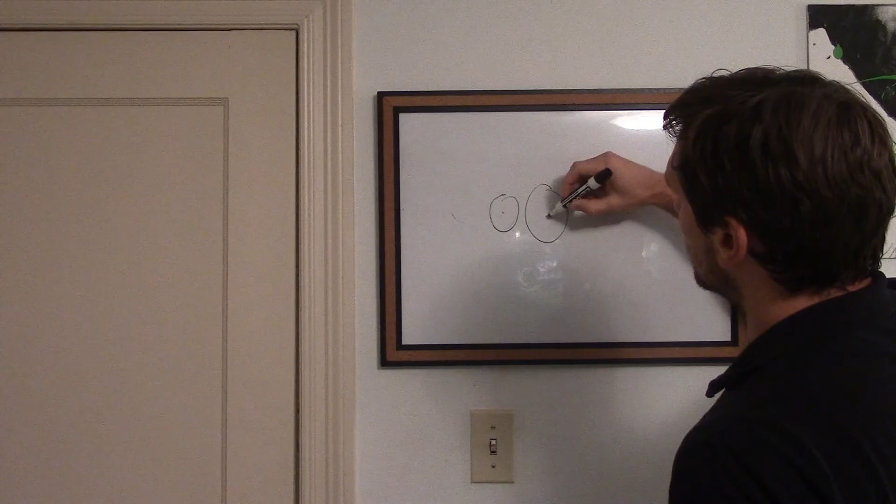So if the diameter of this circle is 1 and this is 2, then basically the torque will double. That relationship is very simple. So that's the uninteresting bit about gears.

So the thing that I found non-obvious was it would be great if we could just design gears as though they were circles and put them together, and if you want twice as much torque, you just make one circle and put it next to another one, and they work great. You could even envision it as a circle, and maybe you put a rubber band on the circle and they touch each other and one spins, and if that works for your situation, then that'd be awesome.

But generally what you need is these teeth on the gear, and the teeth will just act like this. And this wasn't obvious for me. I always thought teeth on gears were just square, but they're actually not square. They're actually kind of curved at the top, and I'm going to talk about that curve and how to make it.

So when designing a gear, you can really think about just two things. You need to think about how many teeth are on the gear, and this gear has 18 teeth, and then the diameter. This gear happens to be 40 millimeters. Once you know those two things, you can design your first tooth. Generally you want to design the smaller gear first and then the bigger one.

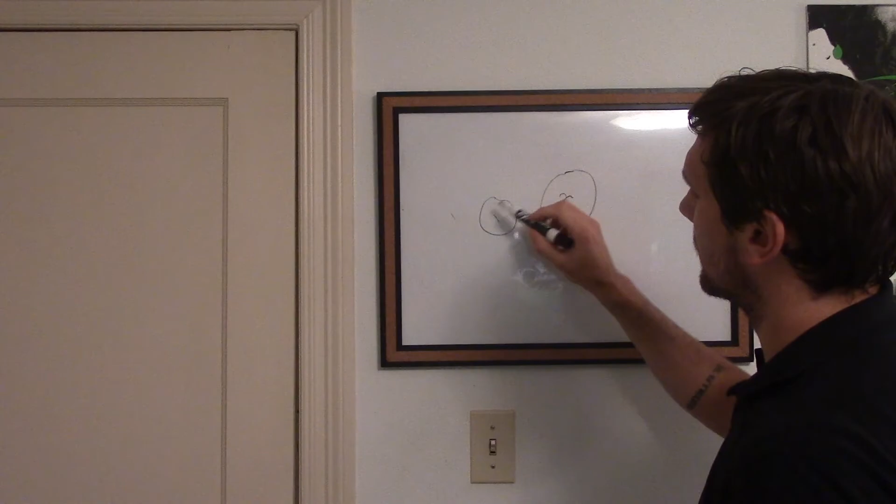And here's why. When you're designing a gear, you need to make sure that the ratio between the diameter and the number of teeth is equal on any gear. So what I mean by that is if you have a gear that has a diameter of 1 and it has 18 teeth, and you have a gear with a diameter of 2, then you're going to need twice that many teeth. So on this one, you're going to need 36 teeth. So think about your first gear, and then just double it, and you'll also double the teeth amount.

And there's actually a word for that ratio in gearing, and it's called the module. All it is is the diameter over the number of teeth. So it's really simple, but it's an important parameter, because we use it a lot when we're designing the teeth of our gear.

So let me just talk about a few concepts. This stuff is almost all really simple. There's one bit that's a little confusing, so I'm going to start with the simple stuff. So let's say you have a gear, this is just a gear, and it will have teeth on it like this. I hope that's okay. So just a few things.

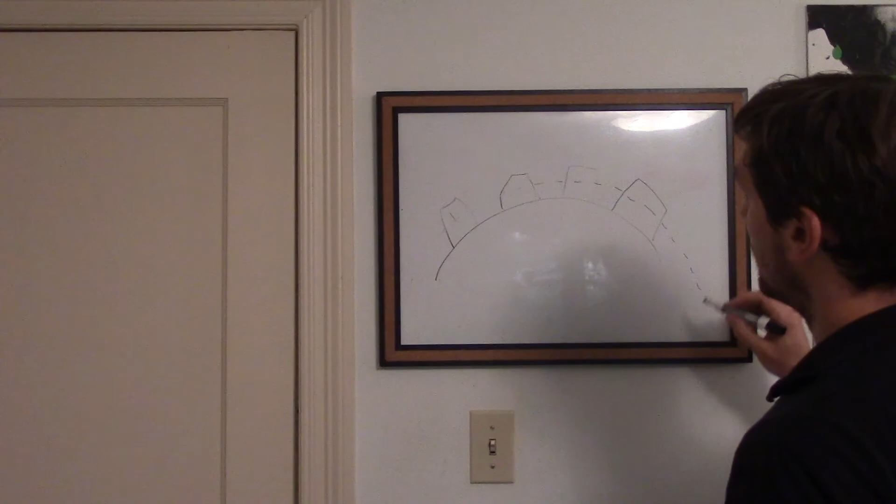So real quick, when you're actually thinking about designing the gear, and I said before we're going to design a 40 millimeter gear, what we actually start with is this circle called the pitch circle, and this is the actual circle that's going to be 40 millimeters. So you can envision that as being 40 millimeters.

What it is, it's whatever radius you want your gear to operate at, basically, is the way to think about it. It's actually a virtual thing. We only use it for design purposes. It is the radius at which gears will generate torque. So it's the radius that you want to use for your ratios.

In other words, if you have a 40 millimeter diameter gear that's driving another one, you're thinking about it in terms of pitch circle. So if you have a 40 millimeter gear, it could drive an 80 millimeter diameter gear and generate twice the torque, for example. So this is our pitch diameter. We'll call it the pitch circle. My marker's not being great. And in our example, it's going to be 40 millimeters.

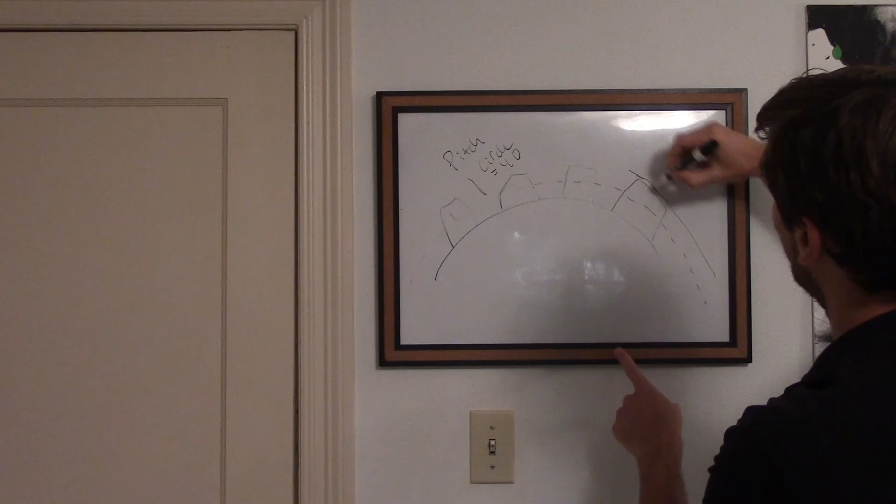And then above it, where the teeth end, right here, is called the addendum. We'll call it the addendum circle. And in order to figure out this length when we're designing, the equation's really easy. Remember when I talked about the module before? The module was just the diameter over the number of teeth.

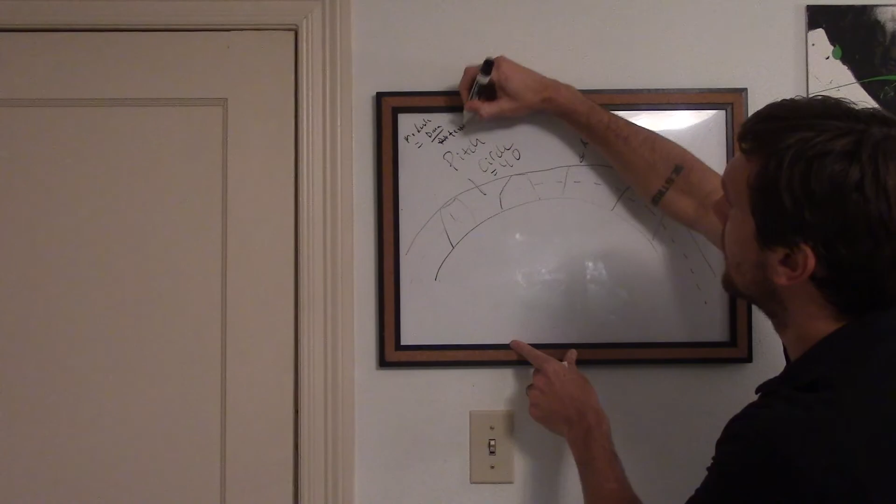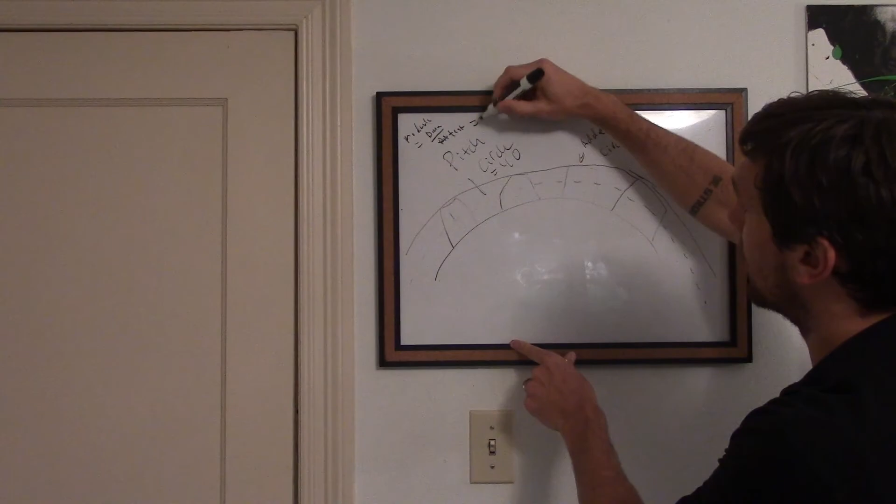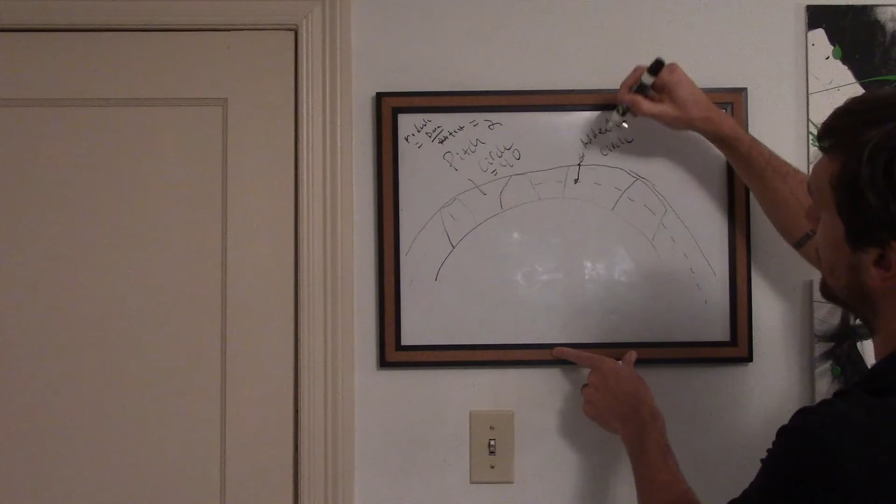And so the diameter we're going to say is 40, and we're going to have 20 teeth on this particular gear. So the module is going to equal 40 over 20, which is 2. So the module's 2. The distance between the pitch circle and the addendum circle is just the module. So here, that distance equals 2.

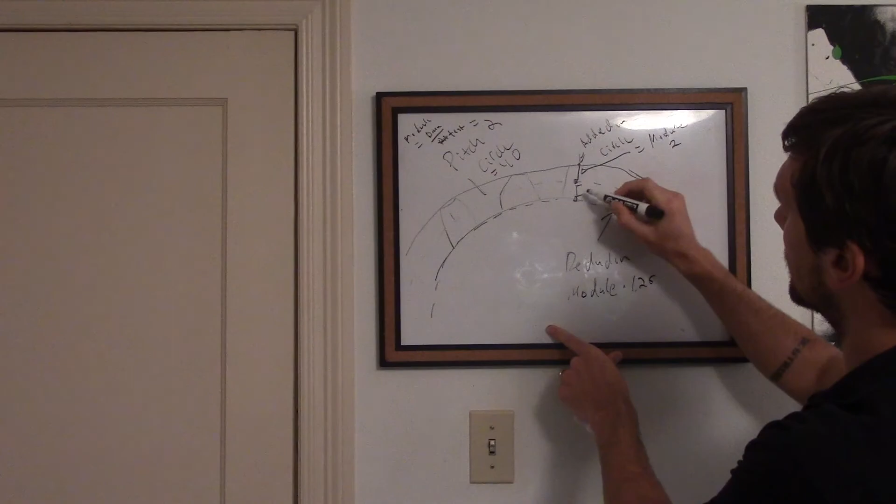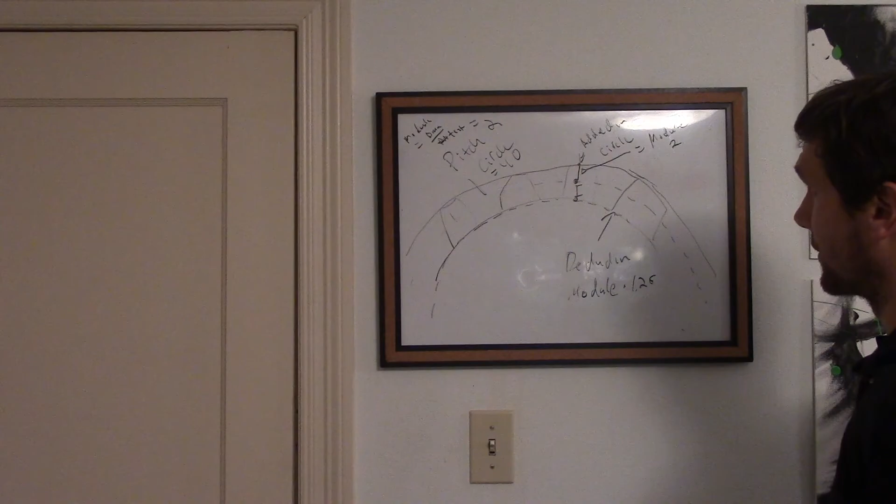Simple as that. And then we have this other circle, kind of the inner circle here, and this is called the dedendum. The distance between the pitch circle and the dedendum circle is a little less obvious, but it's still pretty easy. It's just the module times 1.25. So the distance is a little bit bigger than the addendum. When you're designing it, you start by drawing those two circles, the dedendum circle and the addendum circle.

Now there's another concept, and here's where things get a little bit tricky. I'll erase this, but remember this. When we're designing it, you'll need to know these things. Before I move on, one more simple concept. When we're measuring the tooth width, because the tooth is curved, it's different widths, right? So we think about the width where the pitch circle crosses the tooth. So it's here to here.

And it's the same as basically the non-tooth. So this distance is the same as this distance, right? That's all you need to know for now. It's pretty simple. So again, the tooth width here is the same as the non-tooth width, because it'll be the same as the tooth width of the other gear that's coming in. So all pretty simple stuff as of now.

And so here's where it gets a little bit complicated. It's not very complicated, but in my opinion it's the only thing that you might have to just think about for a second. When we have gears, there's always two gears coming together. Let's say this is the drive gear, and this is the gear being driven. It doesn't really matter from a design perspective which one is which.

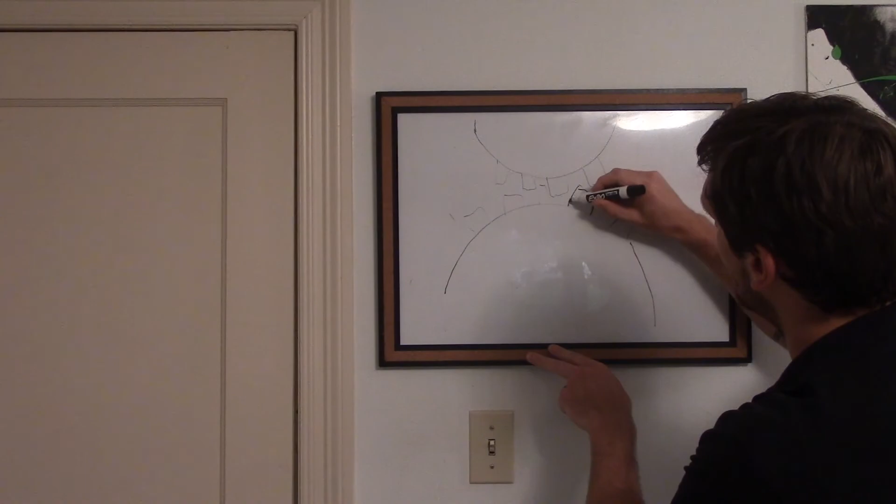So again, they'll have teeth. I have the worst teeth, but they're coming in here, and these teeth are actually curved. So the teeth aren't square. If you look at some gears, they'll be a little bit flat on the bottom, then they'll have this curve, and it looks a little bit like a circle up at the top.

But then you'll also notice on some of them that it'll either be flat and it'll start to circle at some point. It'll kind of be flat here, and then it'll start to circle, or it'll be kind of curved this way. But generally, it can just be flat, and then it'll start to circle.

So let me talk about how to make this circle, because it's not just a circle, and you might be thinking about how to make it. But what that's actually called is an involute curve. So this thing right here is an involute curve. So an involute curve is, if you think about a circle,

think about a piece of tape, for example, and pretend this is your gear, and pretend we're unwrapping this piece of tape on our gear, and we're just drawing a line. And here is our actual circle. And so if this is the diameter of our circle, whatever this piece of duct tape is, this is the involute curve of that circle, if that makes sense. And so it kind of has a cool property.

But the curve of this is actually an involute curve. And it's an involute curve of a particular circle, but that particular circle is not our dedendum circle, and it's not even our pitch circle, which runs through the middle of the teeth, and it's not the addendum circle. So it's none of those circles. So what is that circle? And this is the only complicated part, so try to follow along.

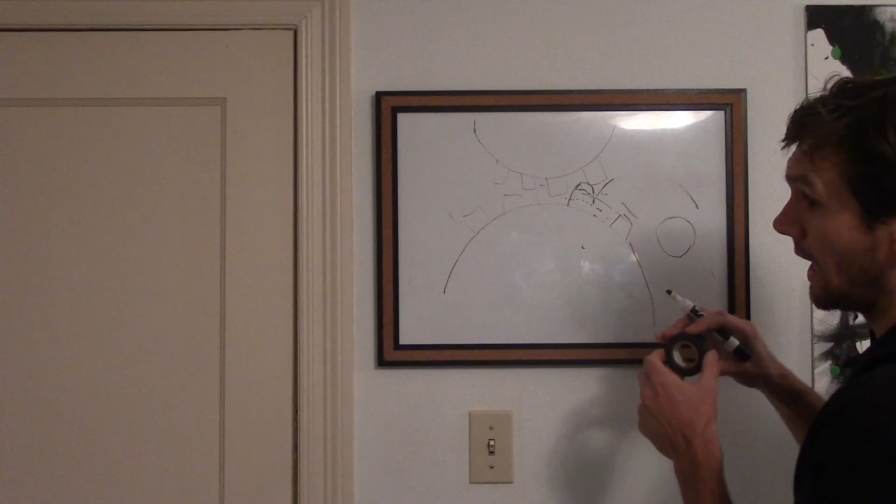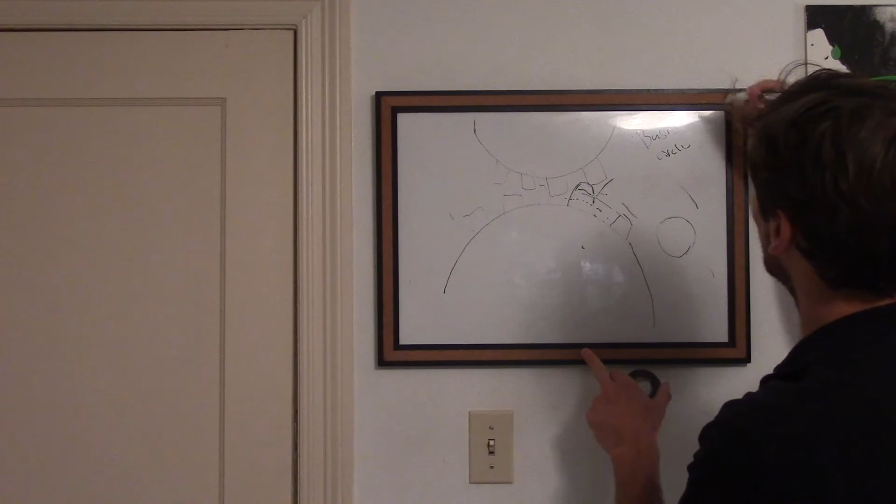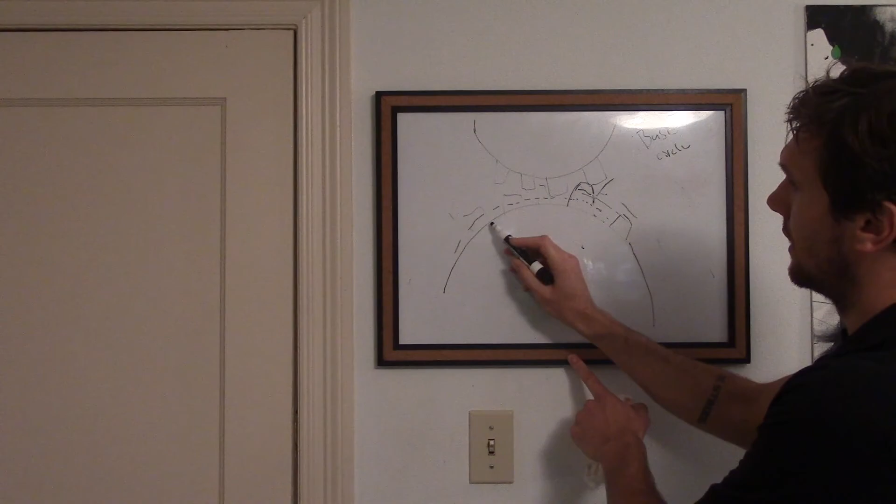So we call that circle the base circle. The circle that we use to draw the involute curve is called our base circle. And before I tell you how we figure out the size of the base circle, it's basically going to be a circle that looks like this. It'll be a little bit larger than the dedendum circle, but it'll be smaller than the pitch circle. And definitely smaller than the addendum circle, which is on the outside.

So the base circle can actually be different sizes. So it can be different sizes, but as we change its size, it'll vary what we could call the pressure angle. And the pressure angle is how the gear generates force, how gear 1 puts force on gear 2.

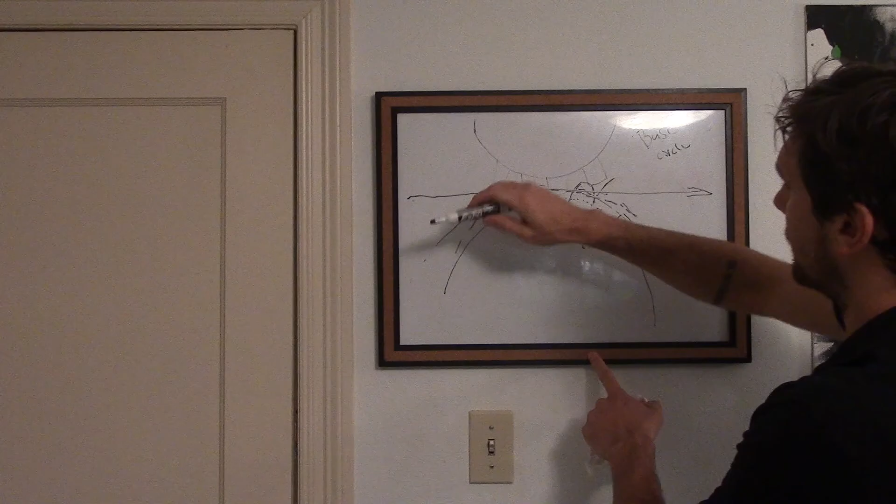And so intuitively, you might just think that the force is always in this direction, kind of perfectly perpendicular, or there's another word for that I'm blanking on, but perfectly straight. But it ends up, as these teeth push against each other, the force is not perfectly straight. It goes at a particular angle, and honestly, I can't remember what it's called, but we'll call it the pressure angle. I think that might be it.

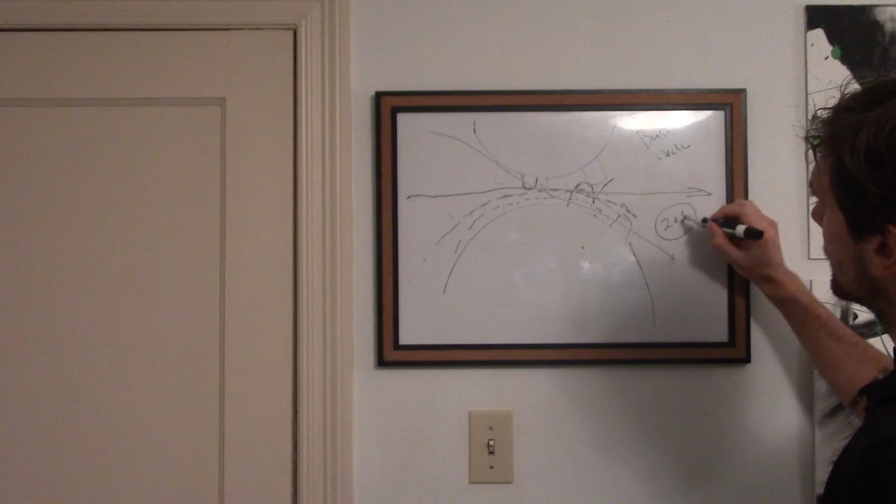So you can choose the pressure angle you want, is the bottom line. And the pressure angle we want is 20 degrees. It's kind of the de facto pressure angle that people making gears use. It comes from engineers doing trial and error. Engineers have tried other angles like 14.5 and 25 degrees. Apparently 20 degrees is the magic number for applying force on one gear to another. It beats me exactly why, but anyways, to get the diameter of the base circle, the equation is really simple.

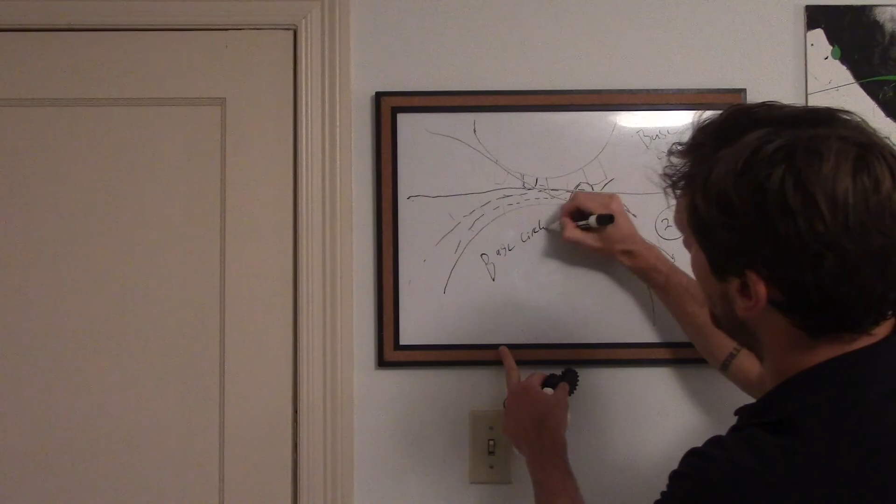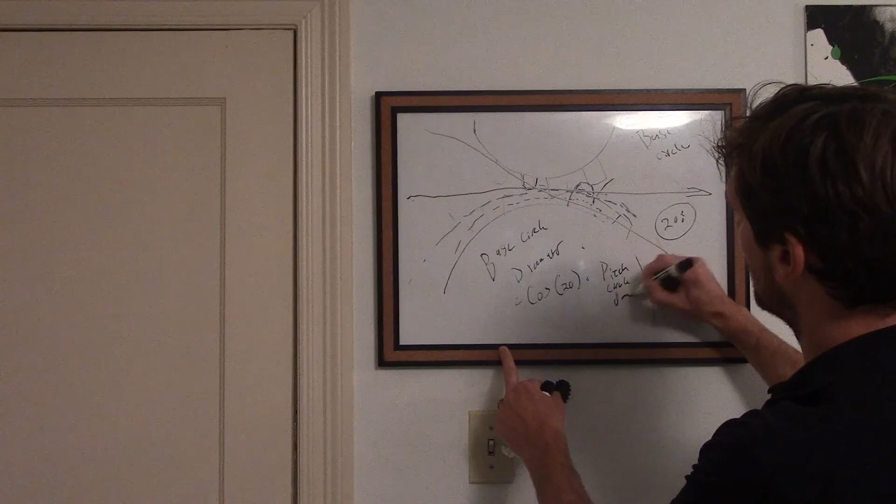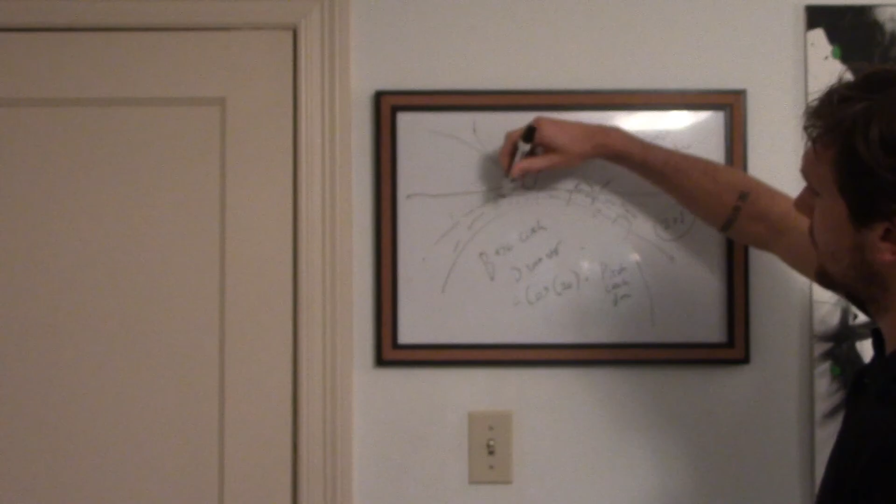So let me write it out. The base circle diameter simply equals the cosine of the pressure angle that we're using, and that's 20 degrees, times the pitch circle diameter. And the cosine of 20 is something like 0.94. So it ends up a little bit smaller than the pitch circle. So if this pitch circle is 40, the base circle is going to be something like 37.

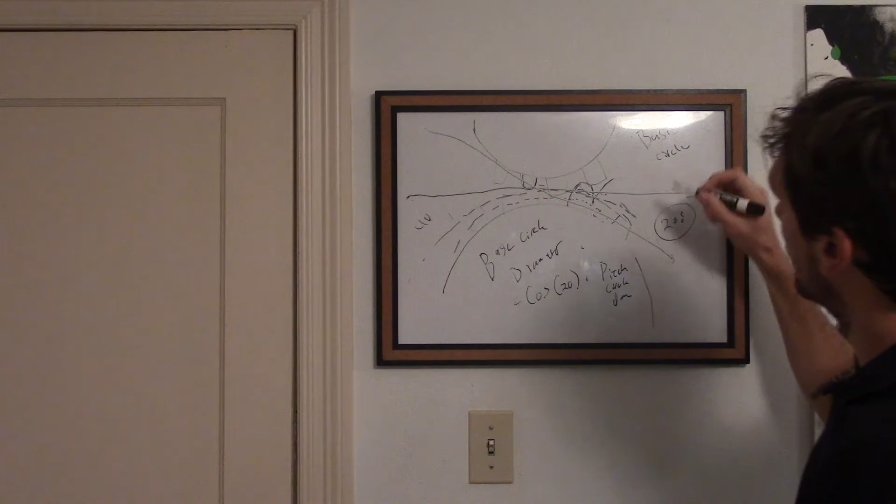And so we're going to use the base circle in order to draw the little sides. We're going to draw the little sides on the base circle, and then we're just going to draw a line straight down from the base circle to the dedendum circle.

And oftentimes that's where you see these little straight lines when you look at a gear closely. They'll be curved at the top, and then the straight line starts. The straight line starts where the base circle basically starts, and it goes all the way down to the dedendum circle. And sometimes it won't be a straight line, but they'll curve it like that.

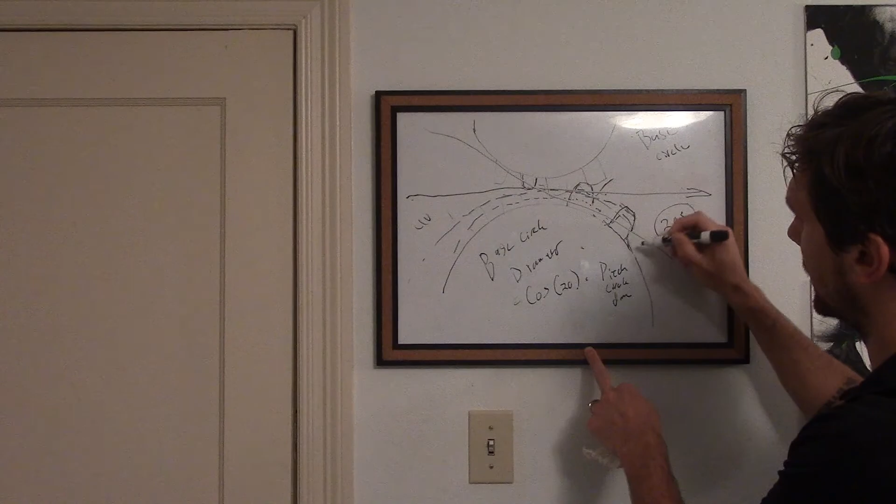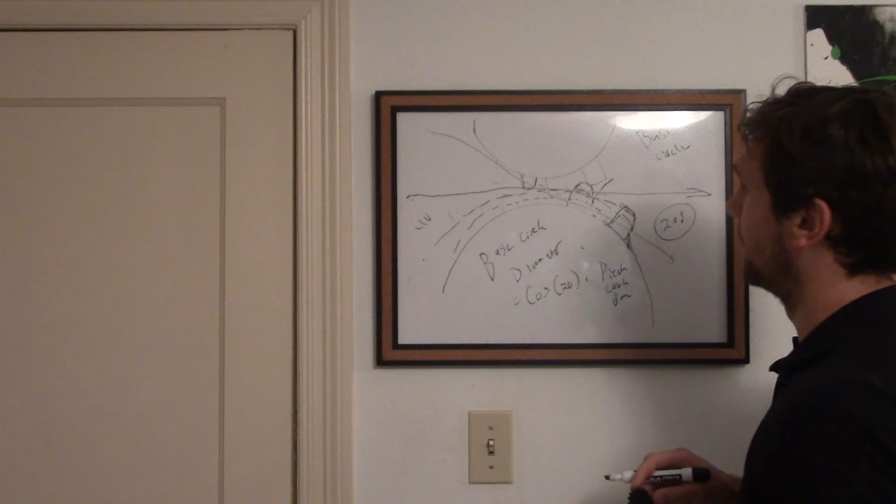So you can curve it in your gear design, and that's just so your gear is sturdier, basically, because if you curve it a little bit, it has more material there to hold. So this is a little bit sloppy, but I'll jump on Inventor and show you this process and actually how to build one. And I think if you're not understanding it quite yet, you'll get it then. So let's move to Inventor.

Alright, so we're building our spur gear, and for this spur gear I chose to use a diameter of 40 millimeters and 18 teeth. Remember, when you're designing your spur gear, you can start with the smaller one, and that's what we're doing here, and then move to the bigger one. But the only thing you need to keep in mind is that you need to make sure the proportion of diameter to teeth stays the same.

So if we're using 40 millimeters for the diameter of the smaller one, and 18 teeth, and then for example 80 millimeters for a larger one, then we need to use twice as many teeth, so 36 teeth. And that ratio is called the module. So that's the diameter divided by the number of teeth. It's as simple as that. We'll go ahead and start.

So I'm going to start by drawing a circle, the pitch circle. Remember, that's the imagined circle, and that's going to be 40 millimeters. Then first we're going to start with the addendum circle, and that's just the module. So let's find the module for this. Remember, the module is just the diameter divided by the number of teeth. So let me just do that real quick.

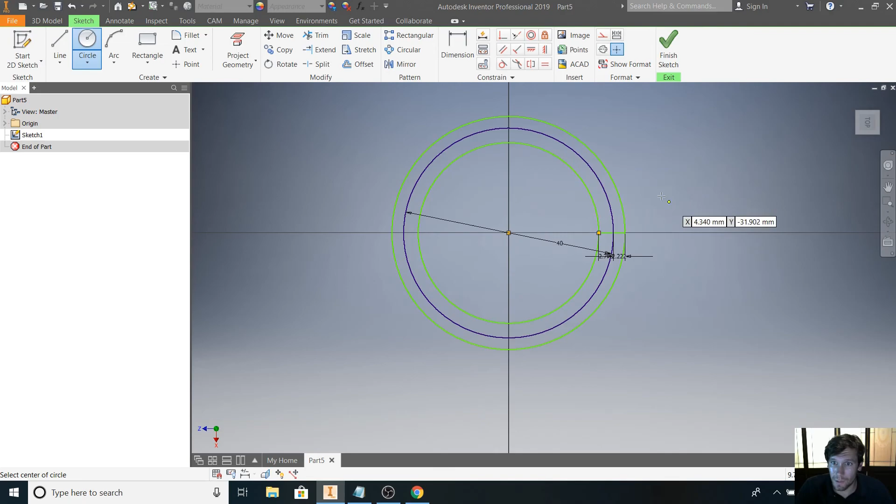Alright, and then we need to draw the base circle. The base circle is what we use to draw the involute curve on. In order to get the base circle, remember we use the angle of 20 degrees. We could use a different angle, but this is the one we want because that's the line of action, or what's called the pressure angle. The equation for the base circle is the pitch diameter times the cosine of the angle. So we'll do cosine of 20.

What is cosine of 20? We need degrees though; it looks like radians. So it's this number, and then we're going to do times 40. So this is the diameter of the base circle, which is the important circle that we're using to draw our involute. 37.588. All right, cool. So now this is our base circle, and you can see it's a little bit bigger than the dedendum, smaller than the pitch circle, and definitely smaller than the addendum circle.

And so how do we draw the involute curve? Remember what I talked about before: you can imagine a piece of string wrapped around your gear and unrolling it out. That would be the involute curve. And if you have a program like Inventor, we can cheat a little bit, which is nice, and we can actually use the equation curve and write an equation for it.

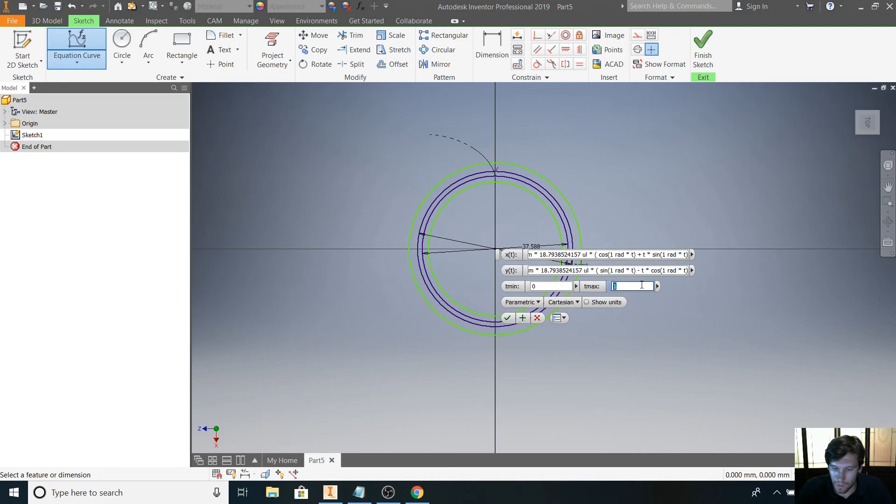So you can see the Tmin and the Tmax, and I'll just show you what it looks like. So you can see this circle growing and growing as I make this bigger. But that is the involute curve relative to that circle. So I don't need it that big. I just need it big enough so it goes past there. It's plenty big.

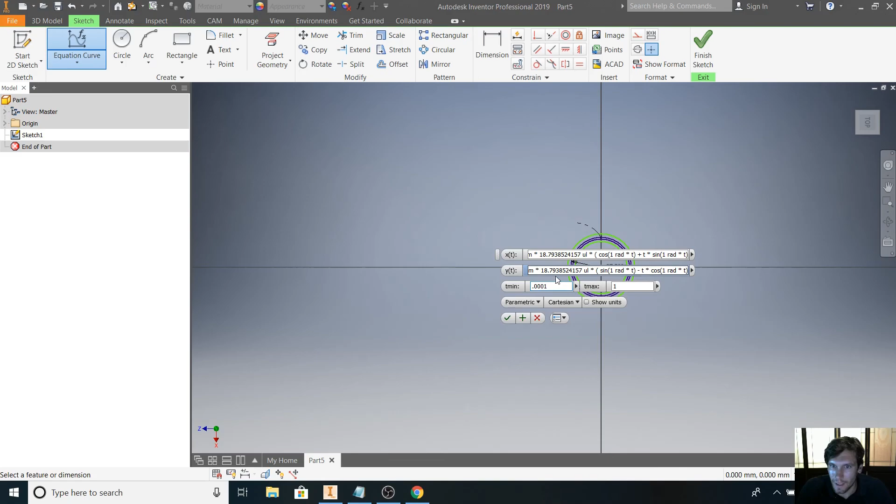Here's another quirk on Inventor. You can't use 0 for some reason. If you put the Tmin as 0.0001, it works fine. Otherwise, the extrude will not work. It's a bit annoying. So there we go. There's our involute curve, and you can see it's coming off of the base circle there. I'm going to go ahead and draw a line from center point right up to that.

And so the other thing, and this is probably the tricky part, is we need to figure out, let me just clean this up a little bit. I'm just going to trim the end of there. So this is the right side of the tooth. And then there's going to be some top of the tooth and then some left side of the tooth. But what we don't know is where the left side of the tooth starts.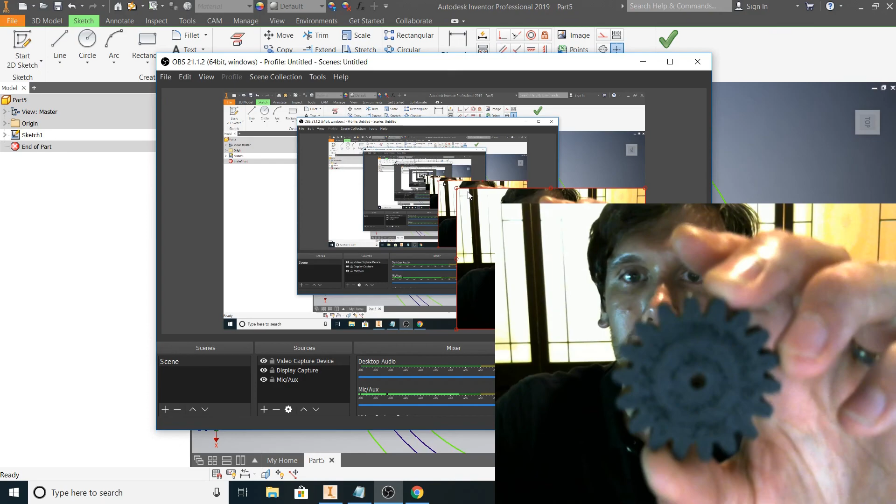And so remember before when I said that the tooth width is the same. Let me see if I can illustrate this. So it's a little bit hard because this is small, but you can see the tooth width. Let me put this here. If you view the tooth width as from here to here on the tooth, that is the same as the, I guess you call that the cavity or the non-width.

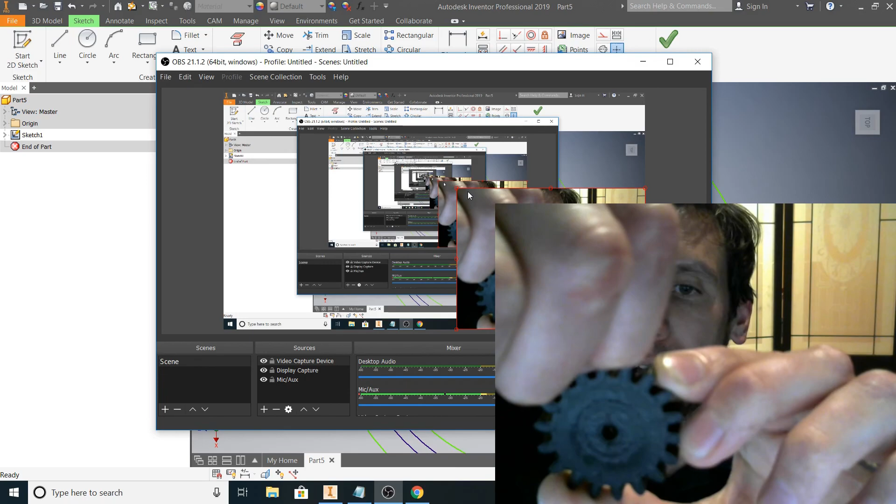So the distance of the tooth width should be the same as the non-width right next to it. But only, let me make this small again, only at the pitch circle. So in other words, from this point to this point to some point over here. And so since we have 18 teeth, we can just do a simple calculation. We know that it's the same lengths.

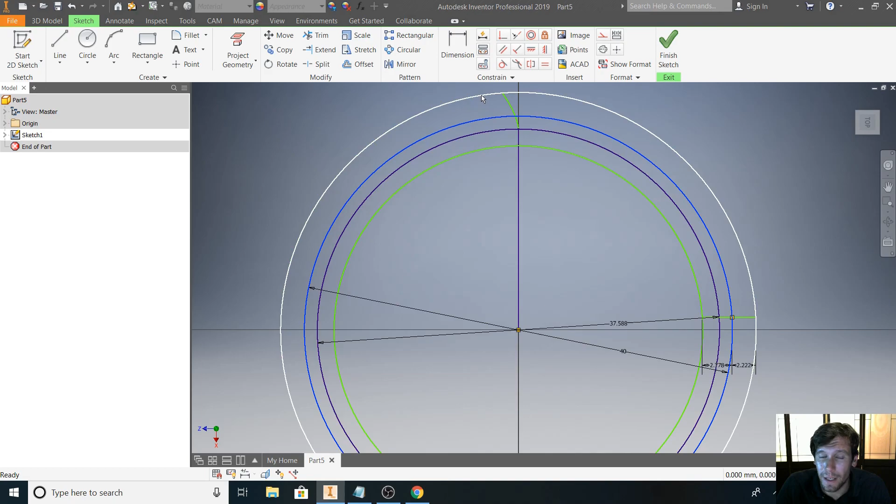So that means each tooth is going to have assigned to it 10 degrees, because it's 10 degrees for a tooth, 10 degrees for a non-tooth, and we have 18 of those. So that calculation shouldn't be too hard to do. So for a full tooth, if we have 10 degrees per tooth, the way I'm doing it is 360, which is the degrees in a circle, divided by 36, which is twice the tooth number.

Because really, if you think about it, there's 18 teeth poking out, but there's also 18 teeth poking in. So in a way, there's not 18 teeth poking in. There's 18 non-teeth is the way I think about it. So you have a total of 36 teeth. So we're just dividing 360 by 36, and we're getting 10 degrees per tooth.

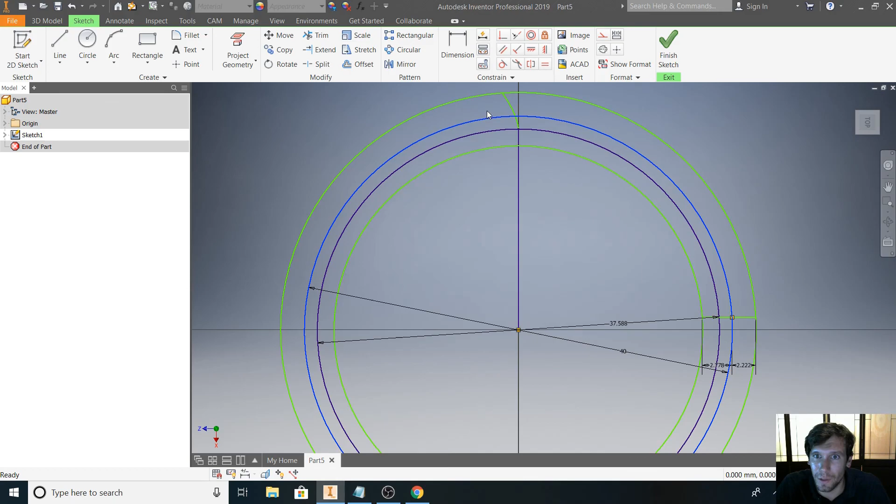And now, since we're trying to find the middle of the tooth, we don't want to use all 10 degrees. We just want to use 5 degrees. So what we're going to do is we're going to get 5 degrees, but first we need to draw.

We're going to draw this line first, and then we're going to draw another line that's 5 degrees away from it. But we need to dimension this. I noticed this before, so that this line doesn't move. So I'll just keep that. Draw another line. And so this is the line that we're going to make 5 degrees. First I'm just going to draw it, and then we're going to dimension it to 5 degrees relative to this line. So 5 degrees, boom.

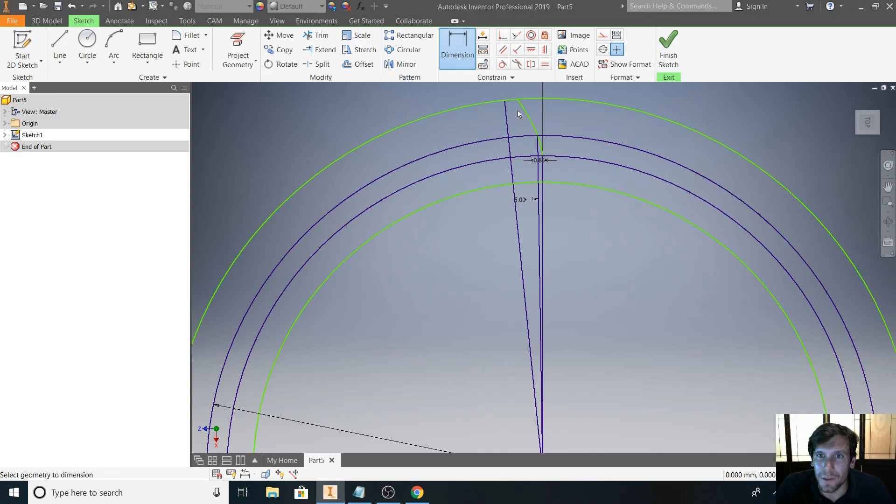And so there's our right side of this tooth. And so we want to mirror. We're just going to mirror it. Mirror line, we'll use the center line and apply it, and then you can see the left side of our tooth. So now our tooth is starting to form. And then I'm going to go ahead and draw a line down to here. Okay, cool. And then you can see the profile of our tooth is formed.

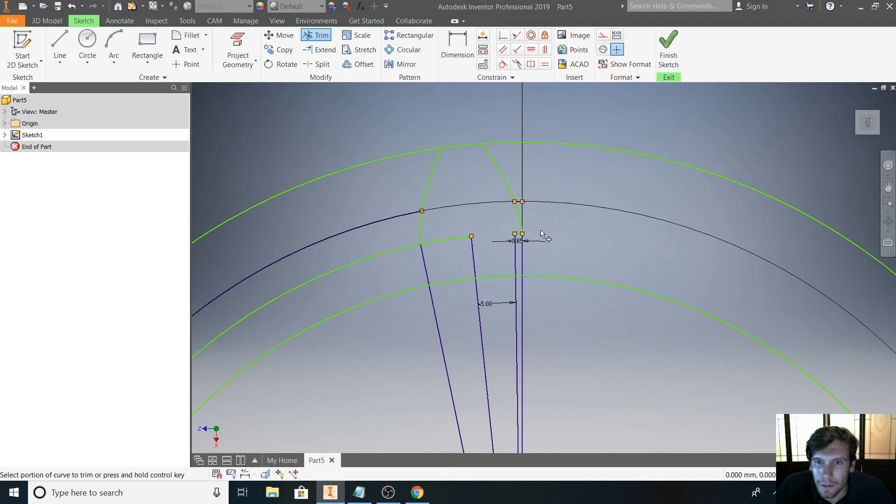And I'm not very good with Inventor, so I don't know the best way to extrude this without just trimming all this stuff. So that's what I did. I just trim all this junk that is not the actual tooth that we need. Wait, okay, yeah, that's all right. Literally just trimming everything. Oh wait, I don't want to trim. That is the bottom of our tooth, so I don't want to trim that, but I do want to trim this. So that's all okay to trim.

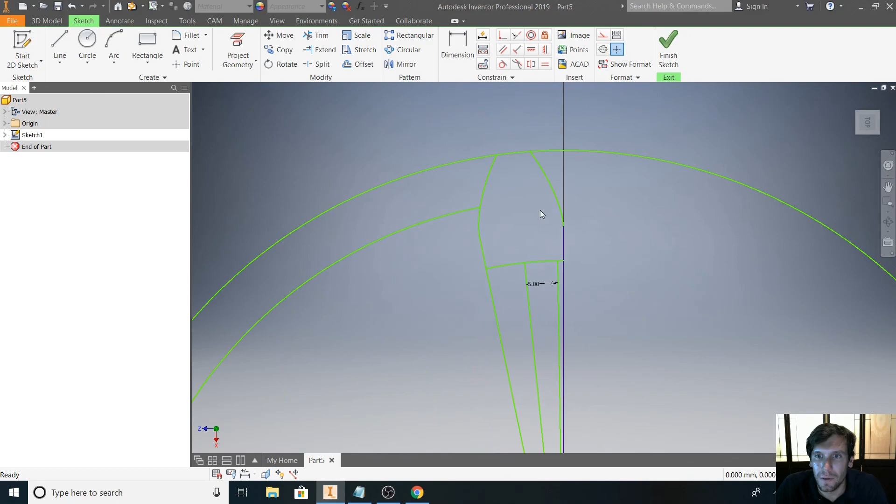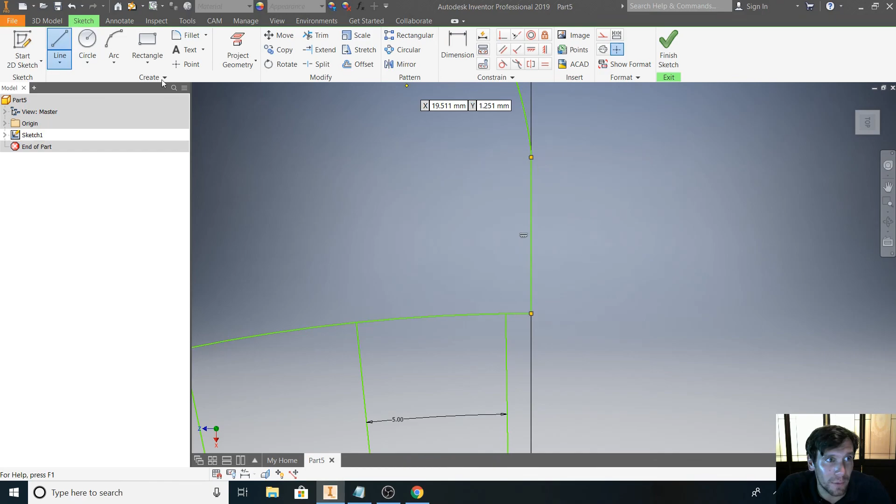Doesn't like that, huh? Delete that. Oops. Okay, yeah. Delete that. I'll even trim this outer thing. I'm not sure if I have to. The one thing I noticed before is, remember how I had to put that .001 in? Sometimes this line it doesn't like, so I'm just going to draw from there to there. This curve, when I started it with the equation, was actually .001, not 0, so it doesn't quite get it right. So I think this profile should work, but I'm just going to trim this as well. For those who know how to use Inventor better than me, feel free to tell me how to do that right.

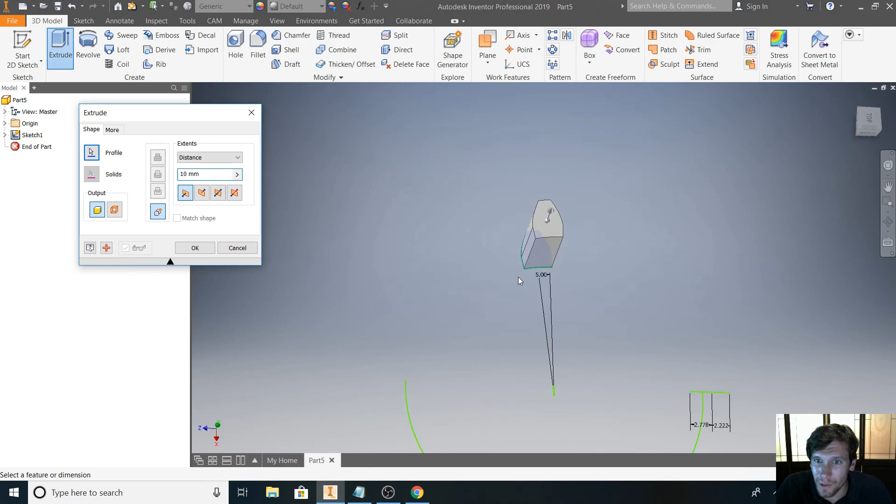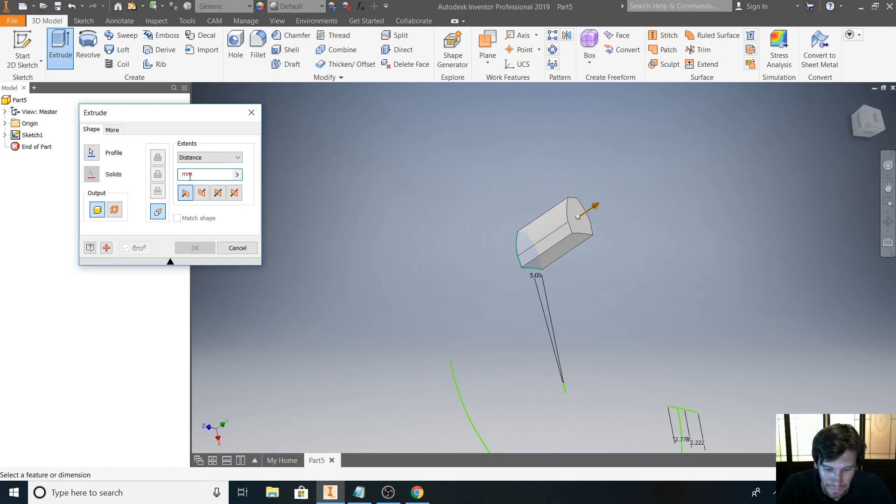So, yep, I'm going to extrude it. And real quick, here's another rule of thumb. As far as the depth of your gear, how deep the gear is, rule of thumb is more than 8 times the module and less than 16 times the module. I'm pretty sure that's right. If anyone knows more, correct me if I'm wrong. It seems kind of thick to me, but we'll go with it. The module's 2.22. It's actually more than 16, but I'm just going to do 16. Before I printed it at only 10 millimeters, and they seem to work all right. So there, then we have one gear.

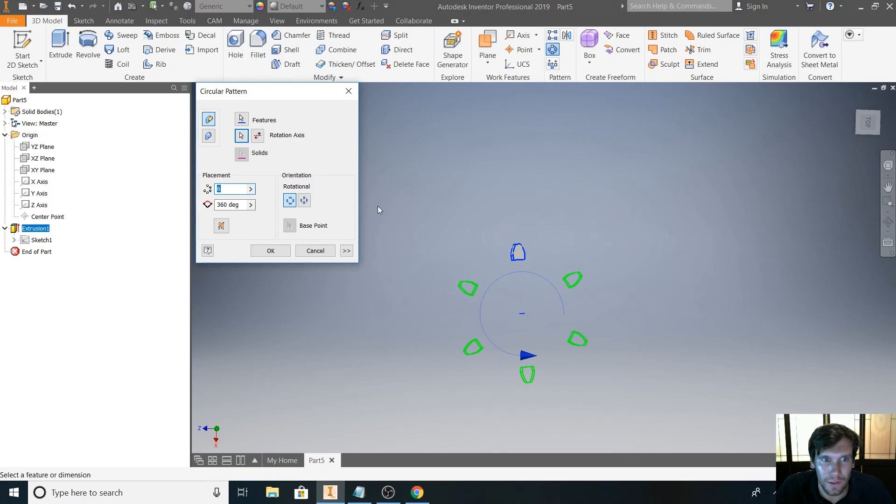And now all we have to do is use the, I don't know what you call it, the go-around tool. That's what I call it. And select an axis of rotation. Looks like it's the Y. And remember, we have 18 gears. And so there are our gears coming in.

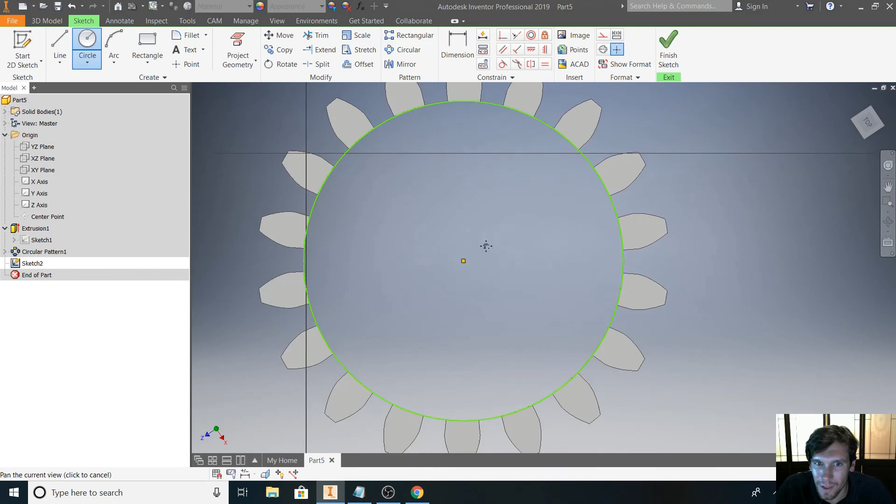All right, cool. So I'm just going to fill this body in with a circle here. Do we remember the 34.56? That seems right. That was the diameter of the dedendum circle, so that seems good there. I'm going to finish this, just going to extrude it 16. There we go. There's our gear.

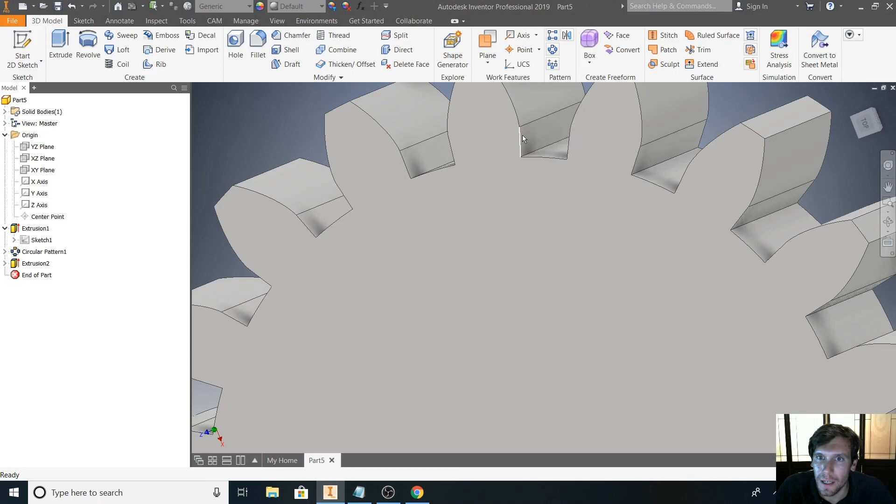The other thing you can do here is you can actually visually see where the base circle is now. That's where the base circle is starting, and then this is where the dedendum circle is starting. And so we have a decent amount of clearance here. And if you want, you can fillet these two edges. Just make sure the fillet doesn't go up past where the other gear would connect. So that's how you make a gear.

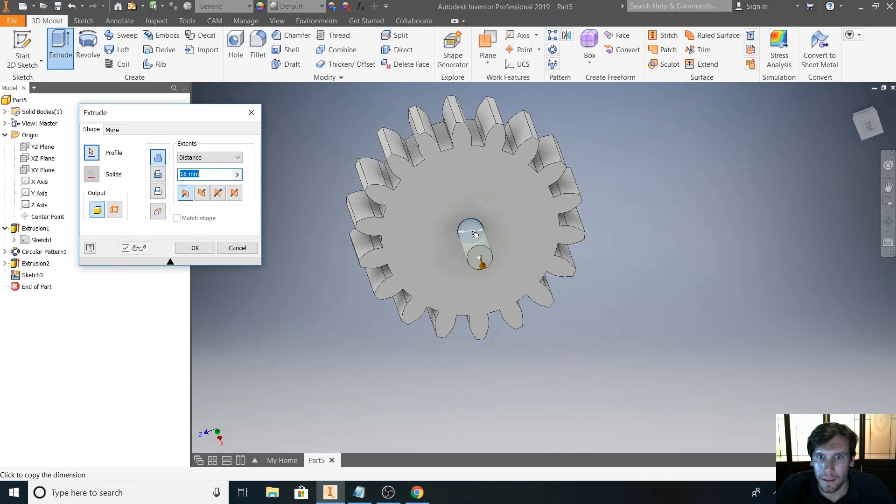And I guess the other thing you can do is put a nice little circle here. I'm just going to make that 5 millimeters. Going to extrude it. Let me go the other way. Cool. So there's our gear, and you can go ahead and print it out or do whatever you need to do with it.

And remember, this is the smaller gear, so when you're making the bigger gear, just make sure you have the same ratio, and you just walk through the exact same process, and those two gears will fit together and be able to spin together. Remember, the module is what needs to be the same on both gears.